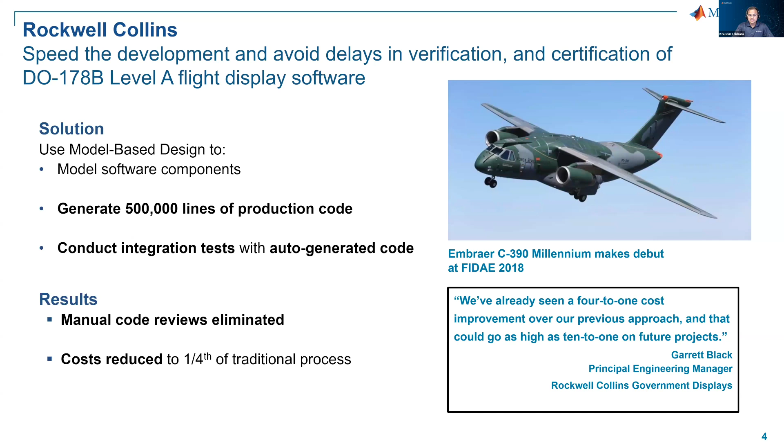So you would be curious, like, where is the industry using it? There are so many user stories out there where industries are using the model-based design approach, and they have developed the verification and certification of the DO-178B and DO-178C requirements, developed their flight controller software, developed their airworthiness certification software requirements. So we are going to talk about that. With this motivation, let's start our discussion with why we need the model-based design approach at the start.

So if we talk about how aerospace systems get built, we start with the concept of operations. We will be doing our research, and from research, we'll be coming up with the ideas that we should have X configuration, Y configuration, or a particular design. Once these configurations based on our engineering research are finalized, we go for the system requirements. These requirements may be either given by the competition organizers, or in the industry, by your customers, or they can be formulated based on your ideas for competing for your score.

So once your requirements are finalized, you move forward and develop your system architecture, and accordingly, you develop your component design, and you implement your component. It may include developing your software as well as hardware, and finally, you integrate all these software, hardware, and various components to make the subsystems, and from subsystems, you integrate the system.

Along with all of this subsystem and system integration, what major requirement comes is system test and verification, where finally you test how your system is performing, whether it meets your requirements or not, and if it meets the requirements, you're well and good to go for the launch, and then you go for your operation and maintenance.

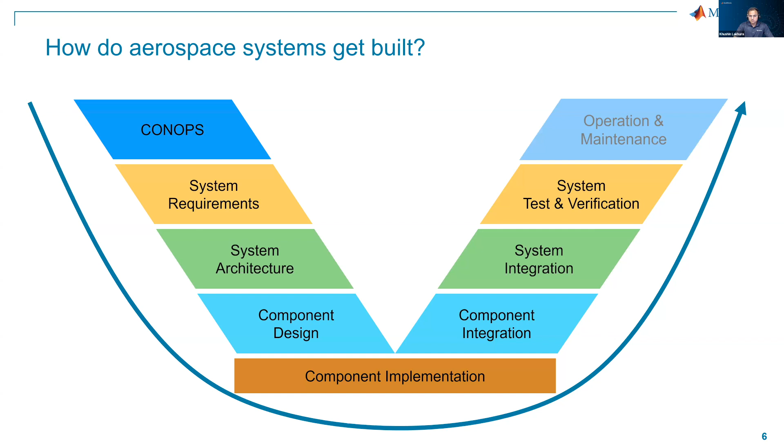So here for this discussion, we are not going to talk about ConOps and operation and maintenance, but we would be more talking about our design cycle starting from system requirements to system test and verification. So if we talk about the traditional design approach, it will have...

It includes continuously moving step by step, and it may have its own issues.

So if we talk about some of the issues, system requirements start with documents. Most of the time, system requirements are either in a Word document or ideas that have been captured into documents, which may be difficult to interpret. Also, if you want to see the impact of these requirements on your component design or on your code, it may not be quite an easy task.

Moving forward, once your requirements are there, you move for system architecture and go for component design. It includes developing your physical prototypes, which is actually expensive and prevents you from doing rapid iteration. And because you are developing the components separately, it does not give you an opportunity for system level testing until your complete system is ready.

If we talk about component implementation, which includes software development, you may be doing manual coding, which is not only time consuming, but as it is based on human skills, it may introduce defects and variance. And sometimes if other people are using it moving forward, it may be difficult to reuse as well.

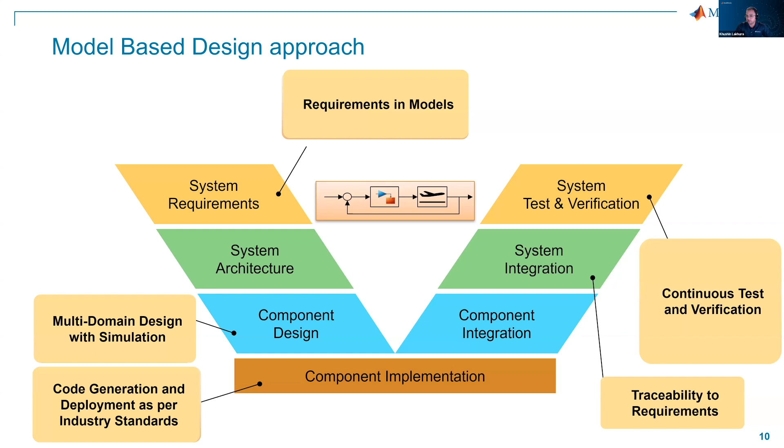So now the point is, what are the tools using which we can perform this model-based design? Can we do it using MATLAB and Simulink? MATLAB is a platform used by engineers and scientists across the world to perform numeric computation, data analytics and visualization, algorithm development, and a lot of things.

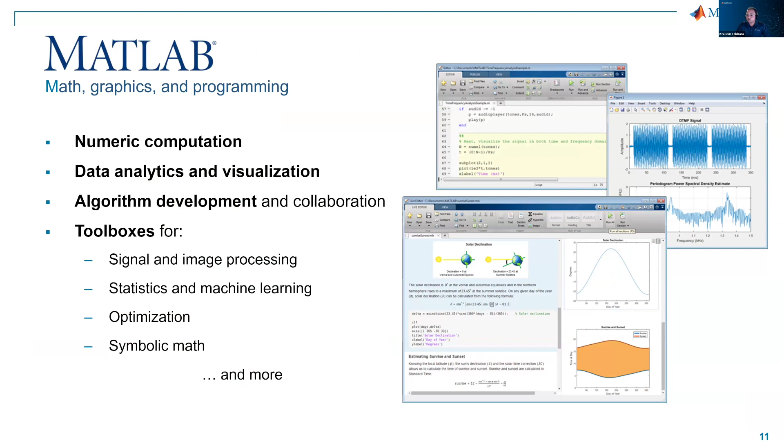MATLAB is used from the audio industry to the aerospace industry. It has its own programming environment, and it's also supported by multiple GUI apps. So it's not just a programming language, but it's more than that. It's a complete platform which helps you to do a lot of modeling and simulations.

Moving forward, we have Simulink. Simulink is actually the model-based design. It's a block diagram modeling approach. So here, instead of coding, you have blocks and signals which you connect, and you create the components, subcomponents, and then the subsystem and the complete system.

This layer by layer approach helps you to take care of your model-based design requirements with more than 100 toolboxes and block sets. Simulink supports a wide variety of industries.

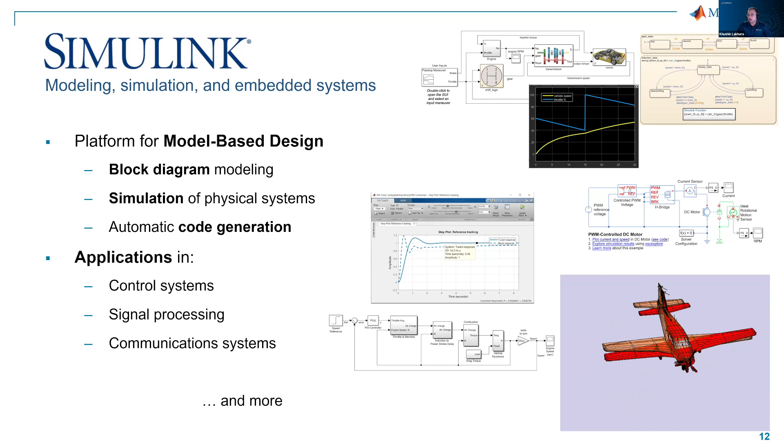So now you would be curious, like we talked about MATLAB and Simulink, we talked about the model-based design, but how is the industry using it? So Bell Helicopters developed their first civilian tilt rotor using MATLAB and Simulink, and they could reduce their development by 10 to 1.

That was a great achievement for the team. Project development time was reduced by 80%. They could find all the problems earlier and eliminate them faster, and they could meet all their certification requirements as well.

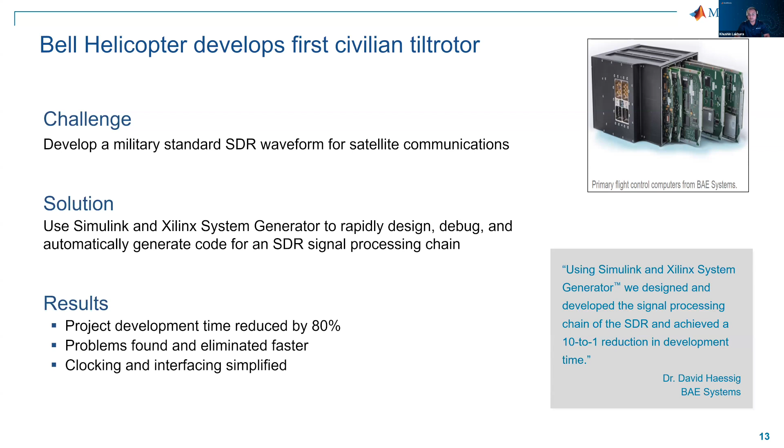Now, as we have motivated you enough about the model-based design, you would be curious about how model-based design is actually accelerating the workflow. What is there which is doing it? If we talk in detail, it has a verification and validation approach.

So how does it help us? Let's do a deep dive and understand how the verification and validation approach, which we would be calling V&V moving forward, how the V&V approach of MBD accelerates the workflow.

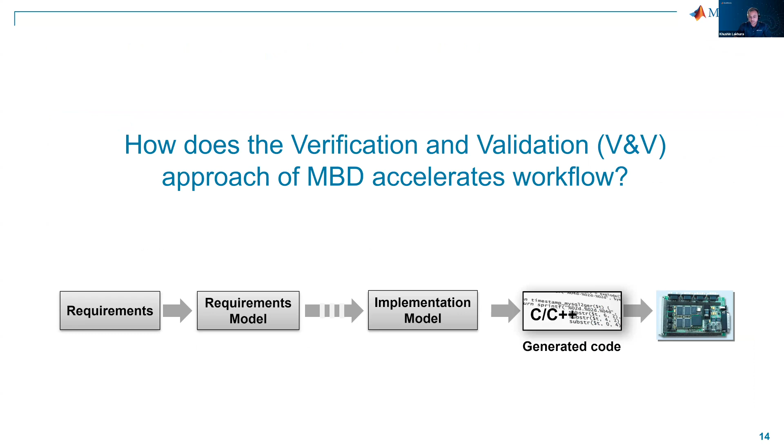So when we talk about model-based design, it's actually the amalgamation of two things: one is modeling, and second is automation. Modeling involves simulation and analysis. So you can develop your components, you can model all your physics using MATLAB, Simulink, and Stateflow.

You can do your simulations. Using the simulations, you can do a number of analyses and optimizations, and optimize your overall system performance.

Once your modeling is done and you are ready with your models, moving forward we had to integrate them with the hardware, and also make sure that whatever is working in the simulation goes well with the hardware. That's where the automation capabilities of the model-based design help you.

So you can do code generation instead of writing manual code. You can deploy your code on the hardware, and with software-in-the-loop simulation and hardware-in-the-loop simulation capabilities, you can actually do real-time simulation and testing, and find if there are any integration issues and fix them. Moving forward, it also helps you to model and code verifications, automating manual checks.

So you don't need to do all the checks one by one. You can develop your custom guidelines for the models, and accordingly, using Simulink Check, you can develop your check guidelines, which can be directly implemented on models.

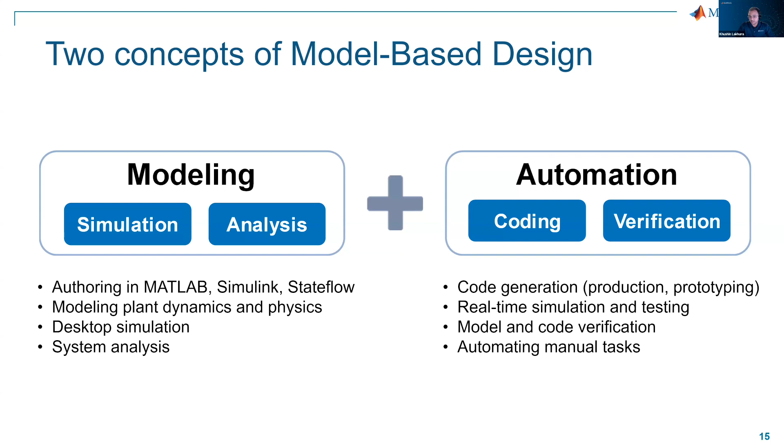So let's deep dive and understand how this analysis and everything comes up. If you look from the competition organizers or customers in the industry, they give us some requirements, and what they finally look for is they want to see the performance. So they link the requirements to the systems, which is connected to the components. So this is actually linking top-down and bottom-up workflows.

But as a system engineer, what we want is an abstract view which doesn't have all the details, but we can get an idea of how my system is working. So for that purpose, you can use the Requirements Toolbox for modeling your requirements.

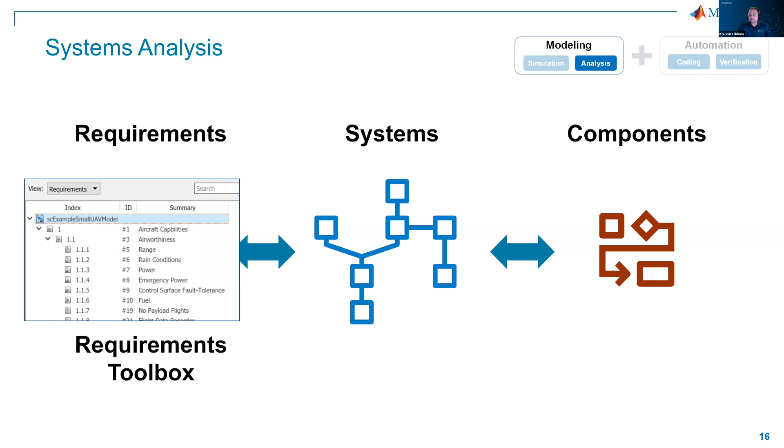Once your requirements are modeled, using System Composer, you can author a complete system architecture and link all of your requirements to your system. And finally, in Simulink, you can model your plant physics or plant dynamics and various subcomponents and generate a complete system-level design.

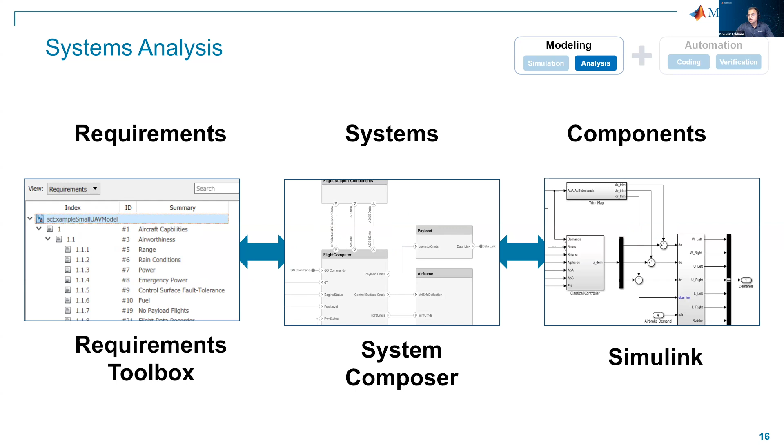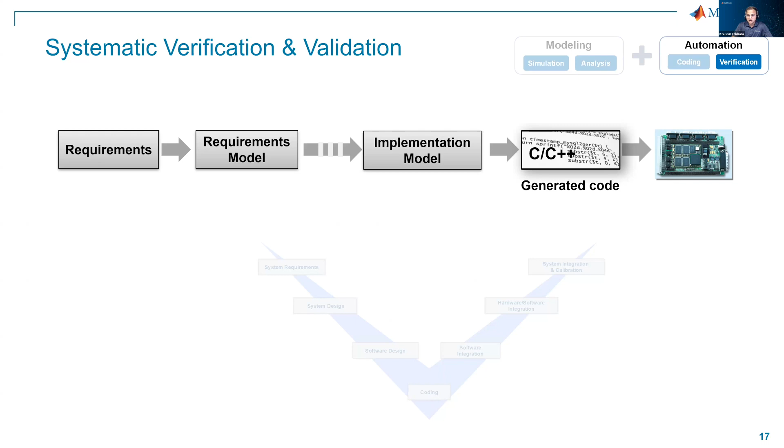Once your modeling is ready, the systematic verification and validations are to find defects sooner and shorten your launch time. This is the outline of the MathWorks model and verification approach, and our customers have reduced cost and project risk by early verification through authoring and managing requirements in Simulink, automating manual verification tasks, and all of these capabilities are part of a workflow which conforms to safety standards. When working with safety critical systems in aerospace, it becomes crucial that you embed safety requirements in your design from the start, instead of completing your design and only then going for certification.

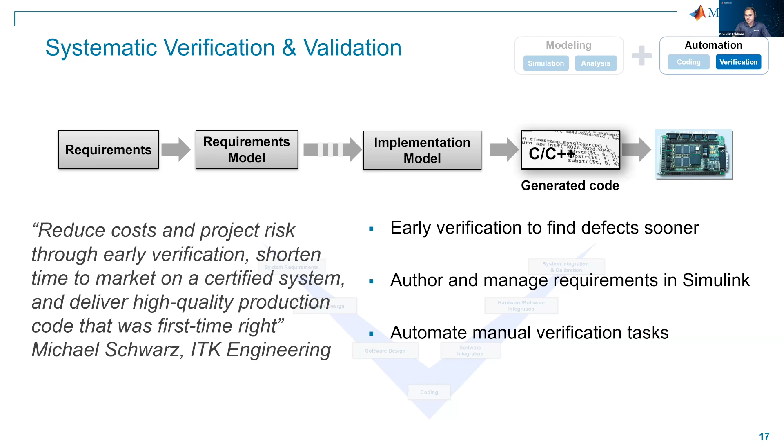Let's move forward and understand how each component of this high integrity verification flow works. Once your requirements are modeled, either from text or other requirement capturing tools, we create the requirements models from that. Once your requirements are formalized and finalized, we create the implementation model. This implementation model mostly covers your complete vehicle, your various subcomponents, your plant dynamics, and all the capabilities you want to capture in your system.

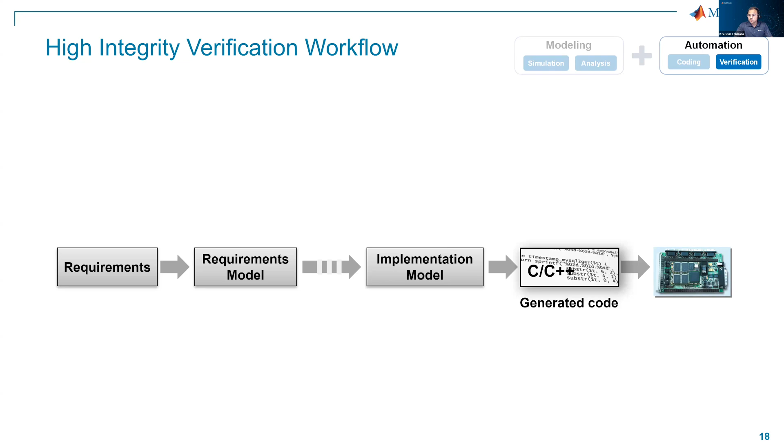You develop that, and once your implementation model is free of all errors, runs all the checks, and also complies with your industry standards, you move forward to generating the code. This code generation can go on the hardware, which can be finally integrated on the hardware. Throughout this design process, it gives an opportunity to identify and trace how the requirements we provided are impacting each part.

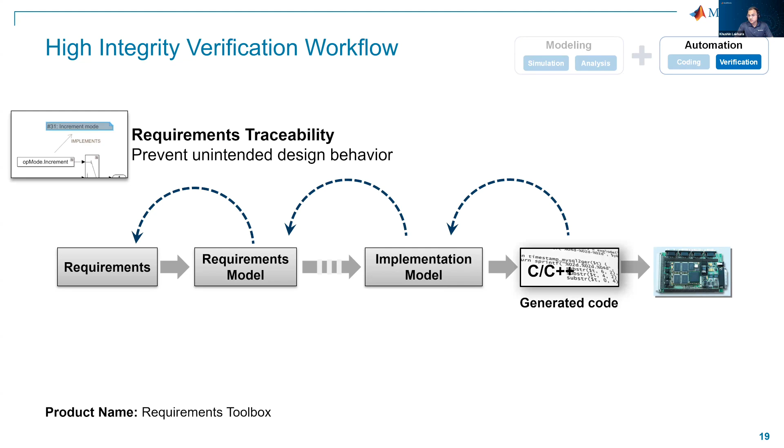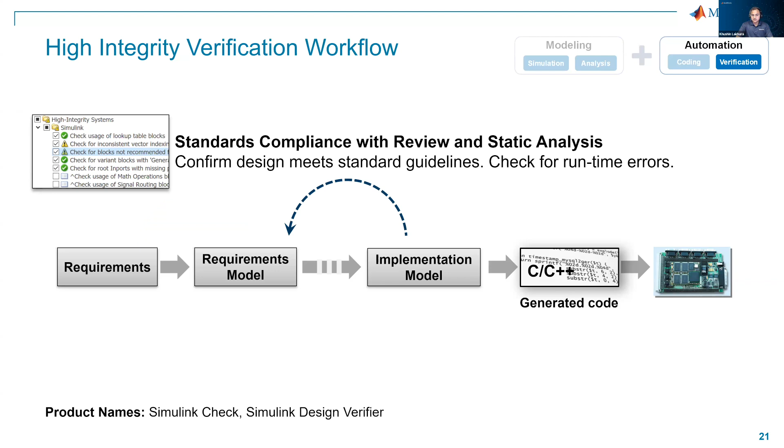So for all these purposes, Requirements Toolbox helps us formalize and validate requirements using requirements modeling. Your requirements conform to the requirement models, and your requirement models are connected to the implementation models. This requirements modeling ensures we are adhering to standard compliance reviews and static analysis. You can use Simulink Check and Simulink Design Verifier to make sure all these things are working, taking care of defining your custom checks or standard specific requirement checks. Once these requirements are done and you do formal verification that your implementation model and requirements model are robust and meeting all requirements, you can move forward and do your model in the loop testing.

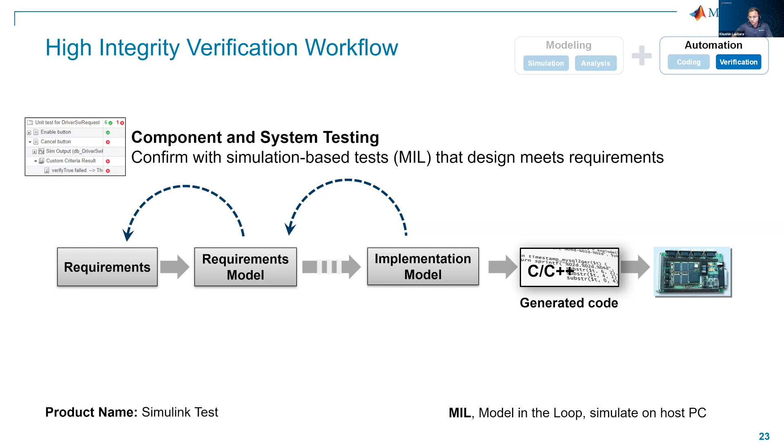Model in the loop testing mostly involves making sure my model meets all the checks and all the defined requirements. These may be design requirements, your industry standard requirements, or your company requirements. Once your model in the loop testing is done in simulation, we can move forward for software in the loop testing, processor in the loop testing, and hardware in the loop testing.

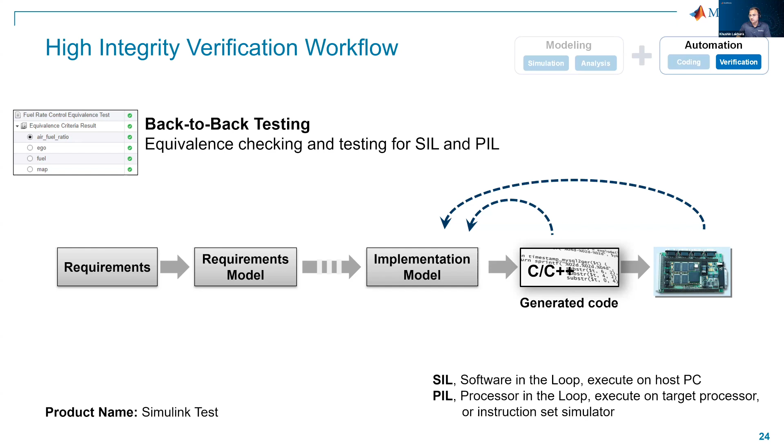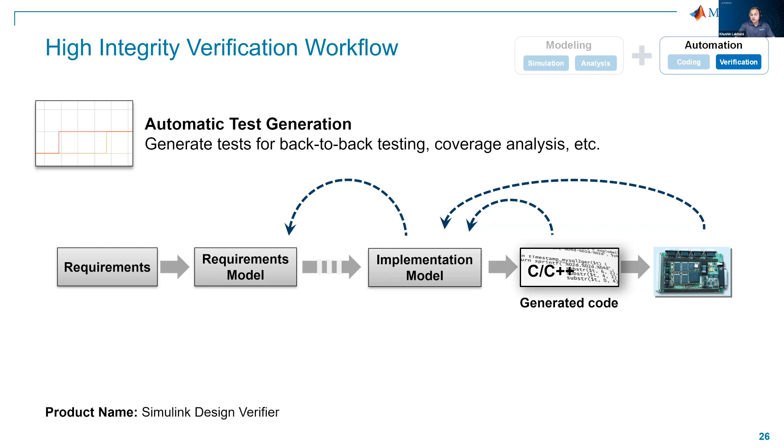This makes sure that whatever code we generated, whatever model we implemented, is also adhering to industry standards, and the generated code is also adhering to your industry standards. Once you perform that, you are ready to generate various tests and test your system performance against various checks. You can do that using Simulink Design Verifier and Polyspace Code Prover.

So that's all about Simulink, and that's all about how the V&V approach of model-based design helps you accelerate the workflow.

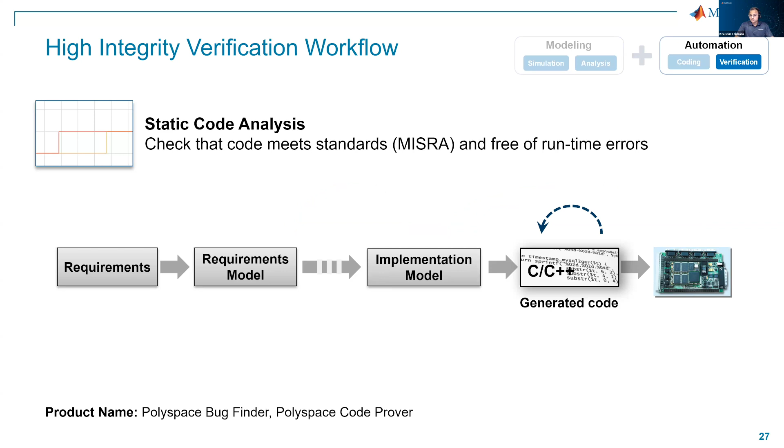This is another user story where Hella reduced their sensor development time by 60%. They modeled their requirements, validated and design verified months earlier than was previously possible with their process. They could also produce a prototype incorporating 80% of product functionality within months, which earlier took years.

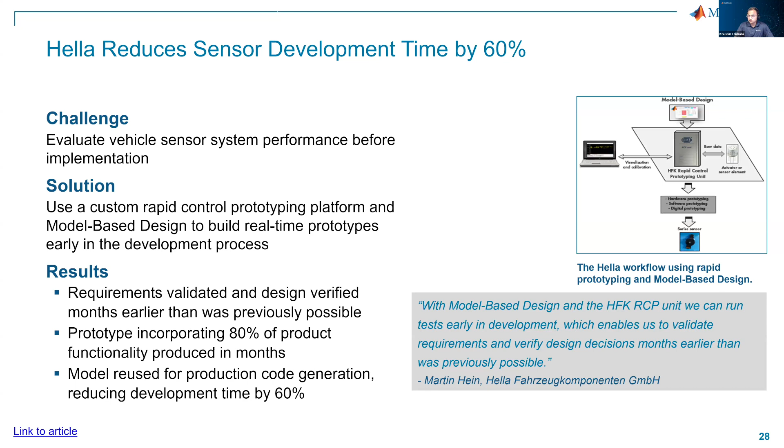With this motivation, I know you would be curious about which tools or capabilities of MATLAB and Simulink help you perform this model-based design. So now we would be going through each part of our model-based design approach, starting from the system requirements - how it helps you, and what tools you can use. Let's start our discussion with system requirements, where, as we discussed, traceability is something very important.

The reason traceability is important is that it ensures your application is complete, fully tested, and meets all the requirements. Also, if you are making any changes, you should be able to understand how a component level change can impact your requirements.

And if you are making any changes in the requirements, what components or subsystems it will impact. So you should be able to get the impact from both sides, from requirements to component and subsystem, and from components and subsystems back to requirements.

And obviously, most importantly, we have to adhere to the industry standards. So let's see how these requirements and issues can be mitigated using the requirements toolbox.

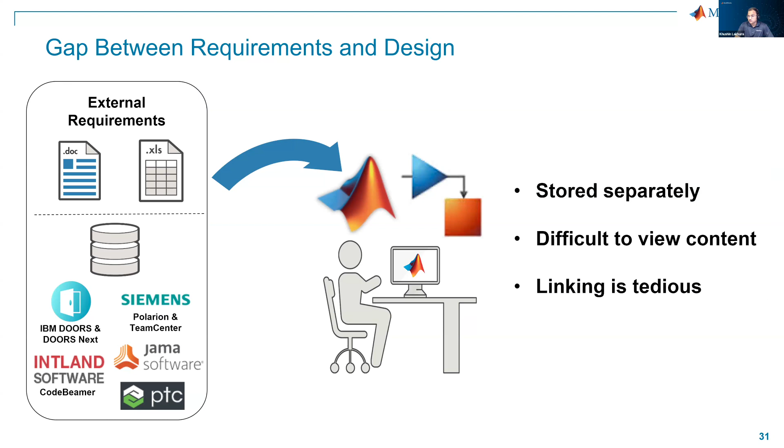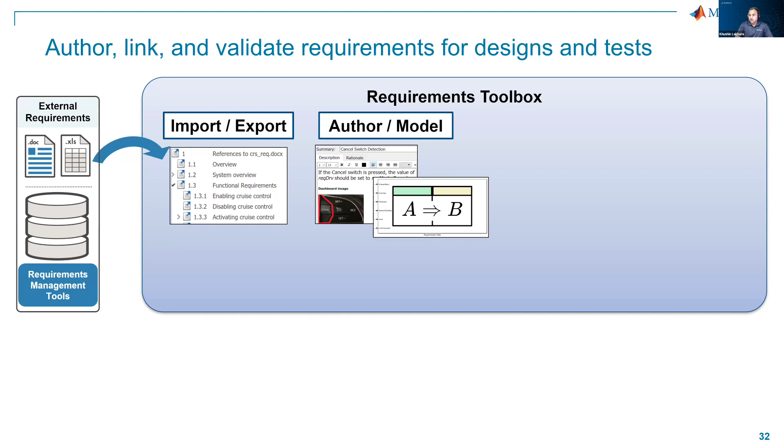The requirement toolbox helps you import all these external requirements into the model-based design approach of Simulink, and you can create your own requirement model. Moving forward, you can link this complete model with the various subcomponents that you are building using Simulink and MATLAB, and make sure all of your requirements are being met.

You can also link all these requirements to various tests and generated code. This gives you the capability to analyze how your requirements are implemented and verified throughout the system, whether there are any issues, or whether relieving the requirements can get you better results.

So all this analysis you can do. And finally, you can generate requirements reports for review and certification submission. Moving forward, there are a lot of capabilities that the requirements toolbox can do. We have a short video here which explains more about the requirements toolbox.

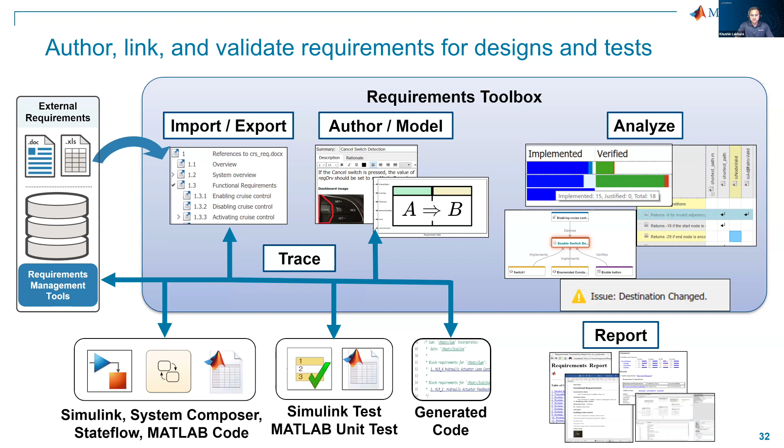Let's have a look. Requirements Toolbox lets you author, link, and validate requirements within MATLAB or Simulink.

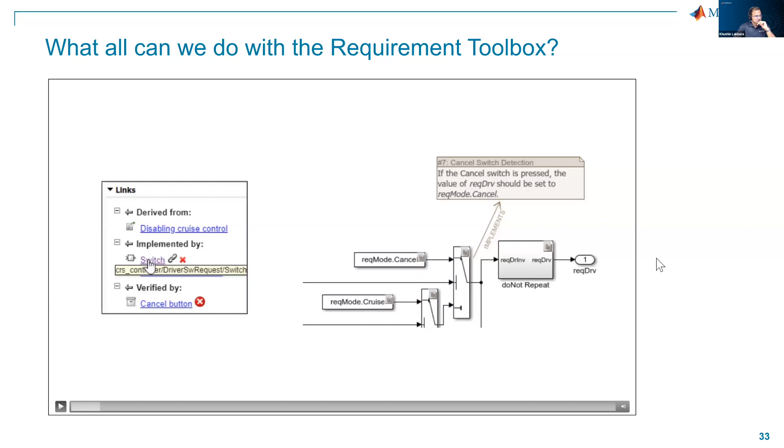Gwen, can you confirm if this video has audio? Yes, the audio is working. Okay, fine, thank you.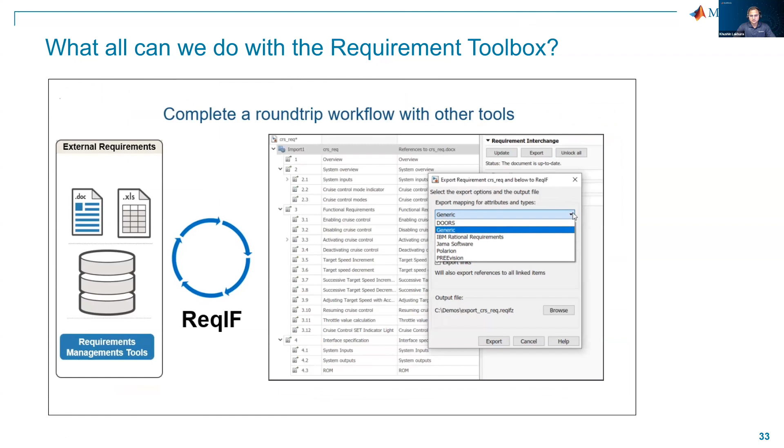Track their implementation and verification status, and quickly respond to requirements changes. Requirements from external sources can be imported and viewed within your development environment. You can exchange data with other tools using an industry standard interchange format.

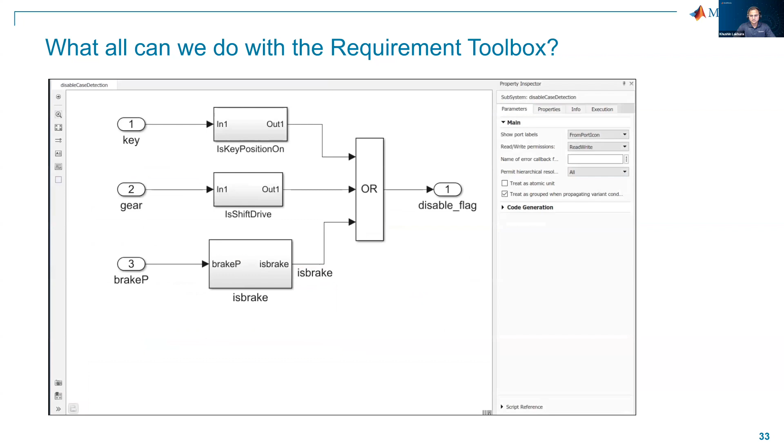You can formalize requirements with a requirements block and validate they are correct. You can manage requirements directly within Simulink, System Composer, and Stateflow. Traceability to designs can be quickly created through drag and drop.

Badges indicate where links exist in the model, and you can show requirements content directly in the diagram without modifying the model.

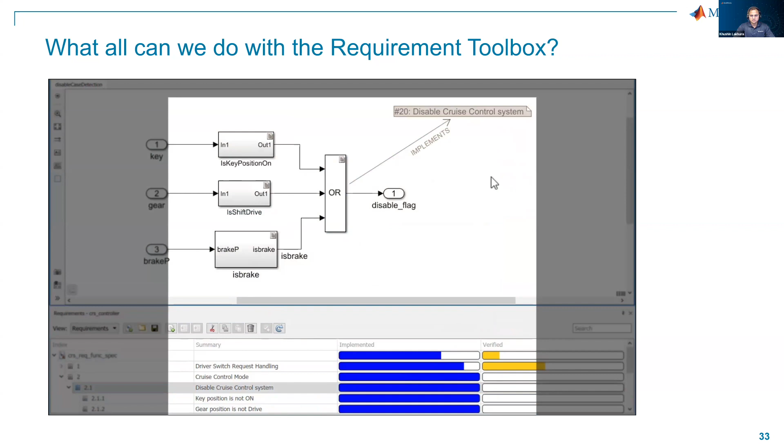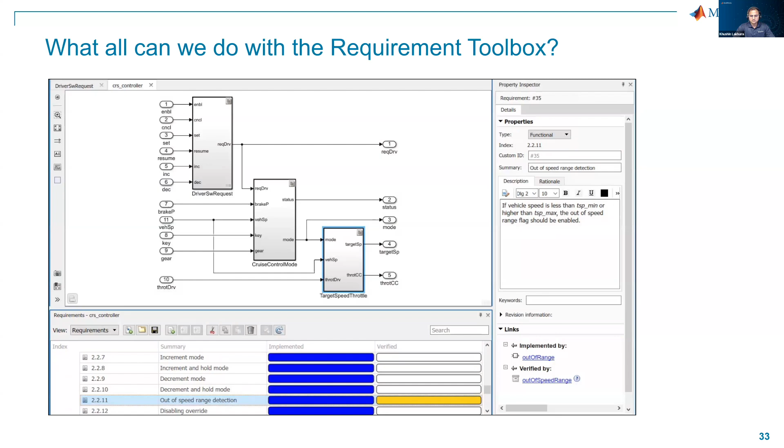Navigate directly to related design elements with traceability links. If you select a requirement, its related design elements are highlighted, and if you click a block, the linked requirements come into focus. You can also link requirements to test cases to track their verification status.

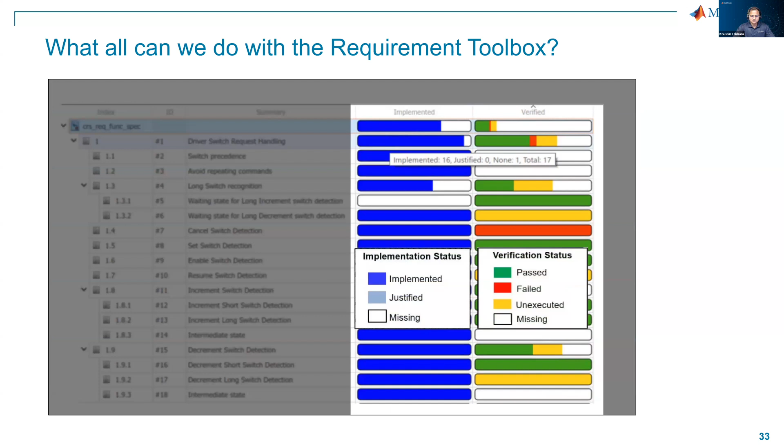The implementation and verification statuses show the completeness of designs and related tests. To review traceability between artifacts, use the traceability matrix. You can directly create links where there are gaps.

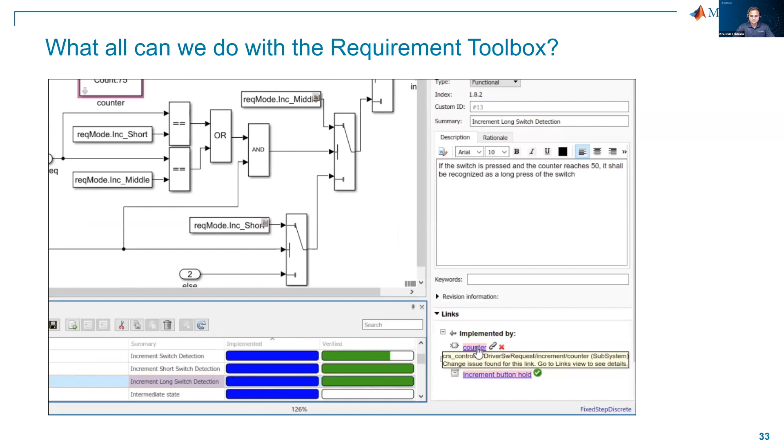When a linked requirement or test changes, you are notified so that you can determine the impact of the change. You can visualize upstream and downstream artifacts using the traceability diagram.

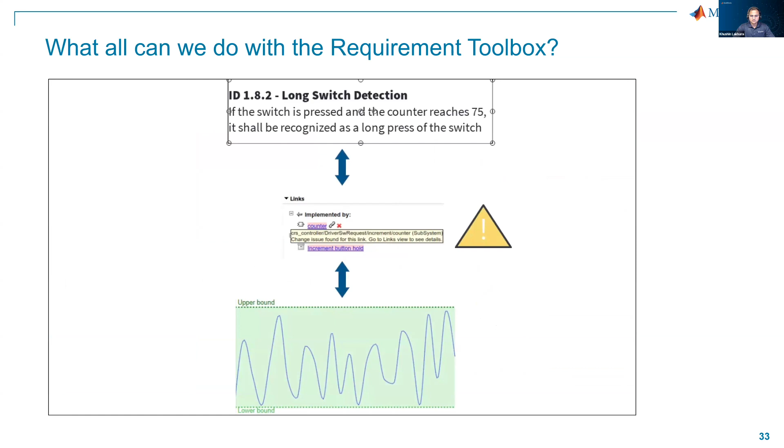Establishing full lifecycle traceability enables you to document that your requirements are being met, understand the impact of any changes, and create a digital thread between requirements, MATLAB code, designs, generated code, and test cases.

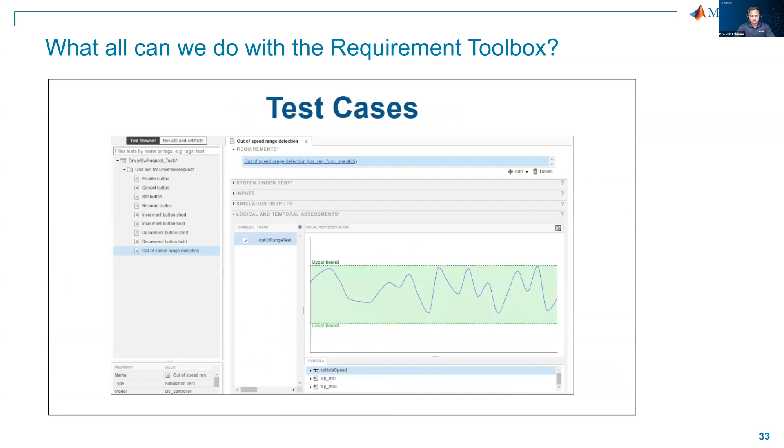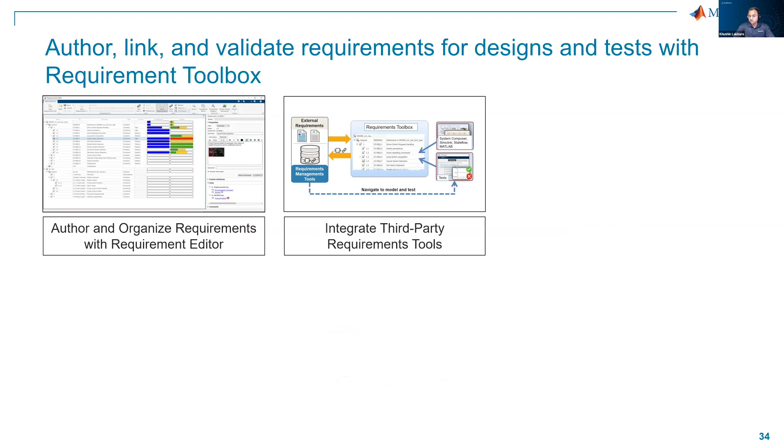So, to summarize all the capabilities of the requirements toolbox: you can author and organize requirements with the requirement editors. You can integrate third-party requirement tools, either IBM tools, or your Word file or Excel file, where all of your requirements are mentioned.

Moving forward, throughout your design process, you work with requirements and design together. So you always know how your components and subsystems or system need to function, or if there is any special impact coming on the component level because of a particular requirement.

It also gives you the opportunity to continuously analyze your requirements coverage: which requirements you've met, which requirements are verified, or which requirements still have issues. Depending on that, you can also add comments and justifications for them.

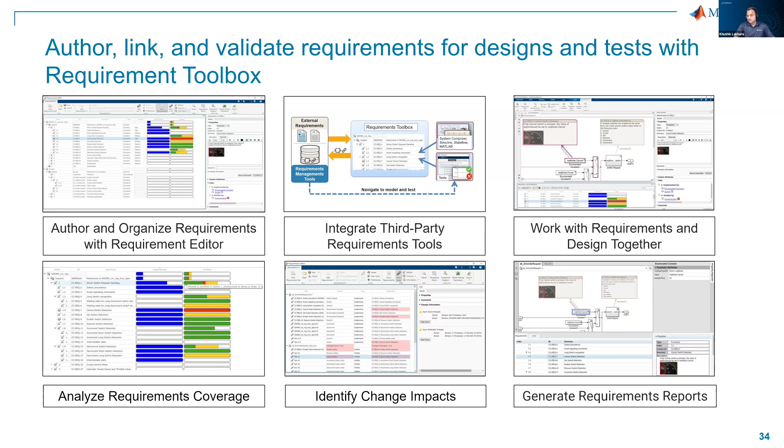It gives you the benefit of identifying the change impact, so you are not worried about what is making what change, either how the requirements impact the subcomponents, or how the component design is affected by requirements. And finally, it gives you various reports that you can generate, which you can use for review and your submissions.

Moving forward to system architecture, once your requirements are finalized, we need to develop the system architecture. At this level, you may not be developing complete design models or subcomponents yet, but you know what each system or subsystem should be able to do. Connecting these requirements to the subsystems gives you, at a very high level, an idea of what your subsystem or component level requirements should be, and what you need to take care of for integration.

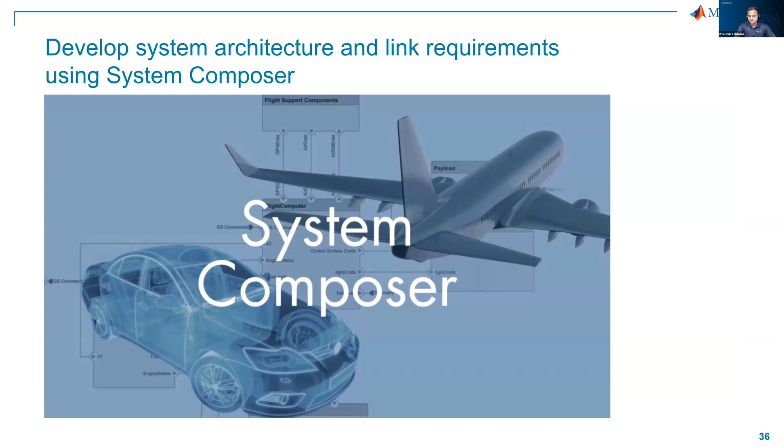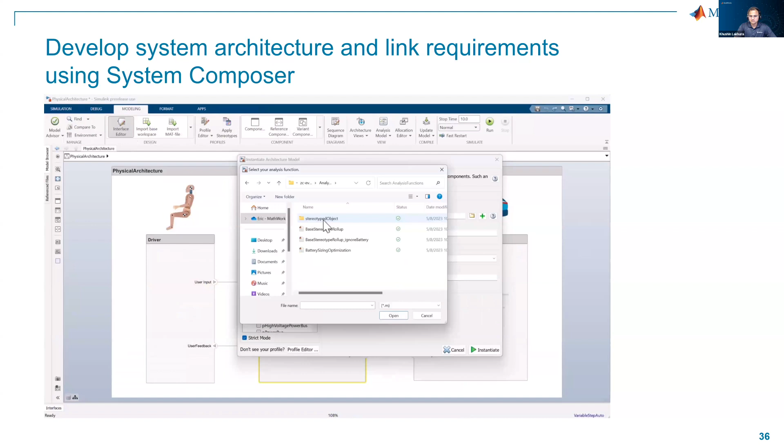Let's see this with a short video on System Composer, which helps us develop the system architecture and link requirements. System Composer is a model-based systems engineering tool for system and software architecture design, allowing you to decompose complex systems or a system of systems into smaller, more manageable pieces. This easy-to-use tool bridges the gap between high-level requirements and low-level algorithm and simulation workflows, allowing for scalable specification and analysis of system and software architectures.

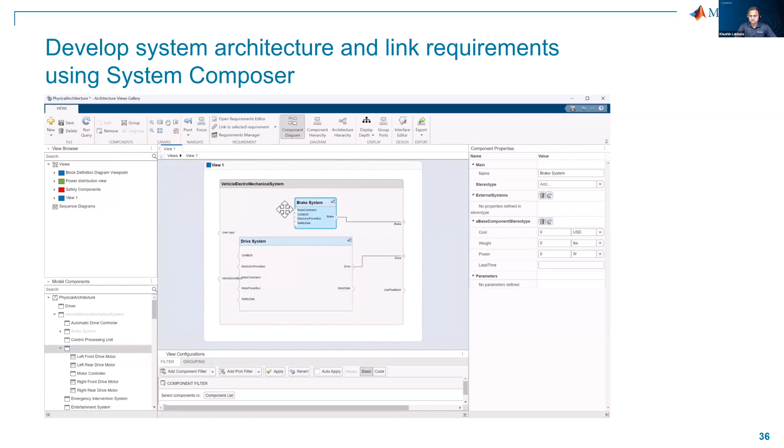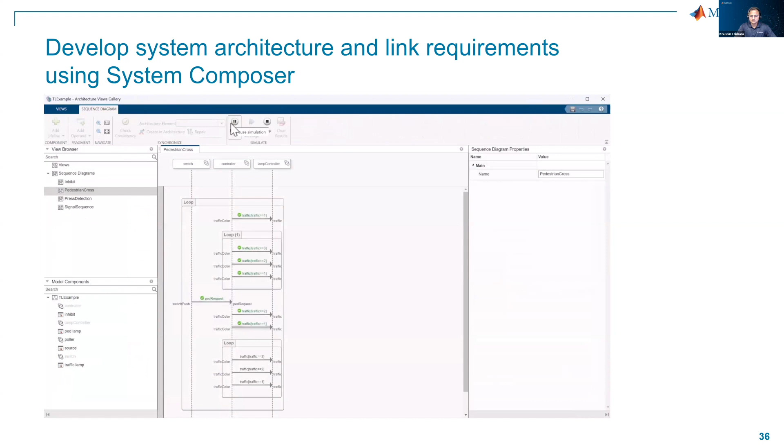The tool lets you author and edit architectures, link requirements to architecture and test cases, and define custom properties of architectural elements. With System Composer, you can generate new views of the model to gain insights into functional flows, component dependencies, and more, and you can also edit those views directly. You can define software architectures from built-in templates that are generic or specific, like AUTOSAR Classic and Adaptive. You can even model the behavior using various formalisms, such as block diagrams, state charts, and sequence diagrams.

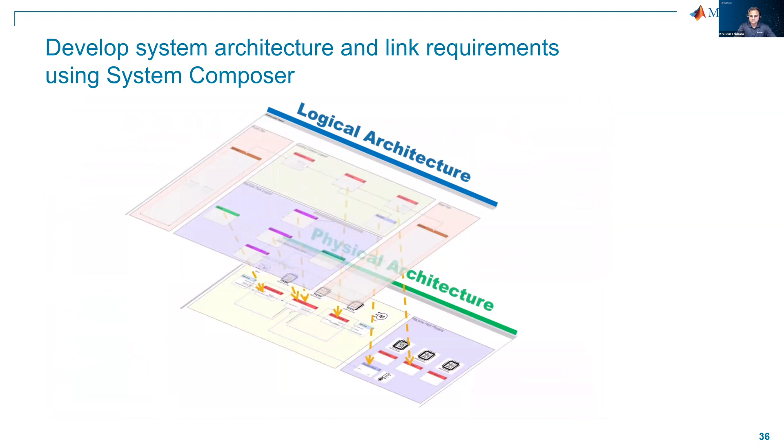Another feature of System Composer is the ability to allocate or establish relationships between elements of different architecture models, which may represent different abstractions of a system, such as functional decomposition and logical or physical architectures. And of course, you can seamlessly integrate with Simulink, FMUs, legacy code, and more, for traceability and continuity from MBSE concept through model-based design and verification.

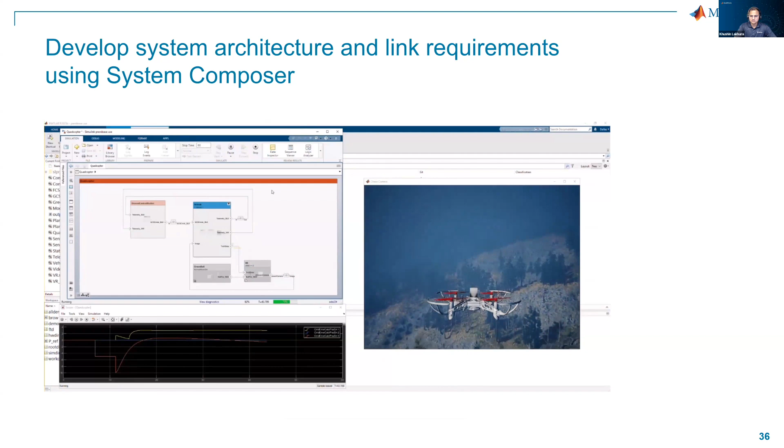So to summarize the video, System Composer gives you the capabilities to author your architecture and associate various architecture models to your requirements, adding custom properties to them, and doing architecture allocation to various requirements. You can also do behavior modeling, and finally, you can implement all these requirements with the component and system level model-based design.

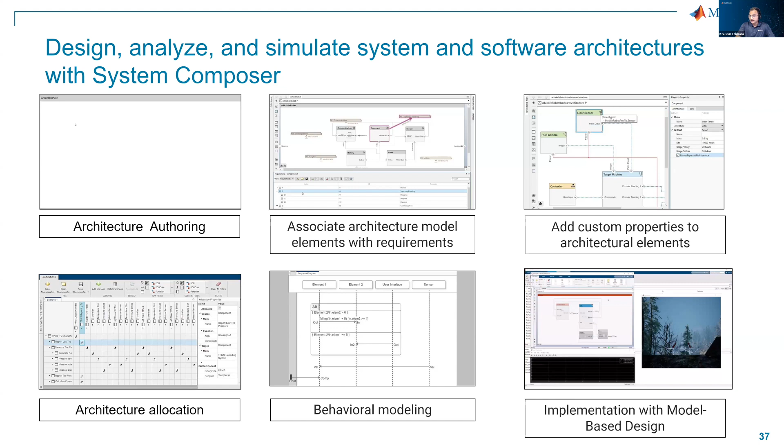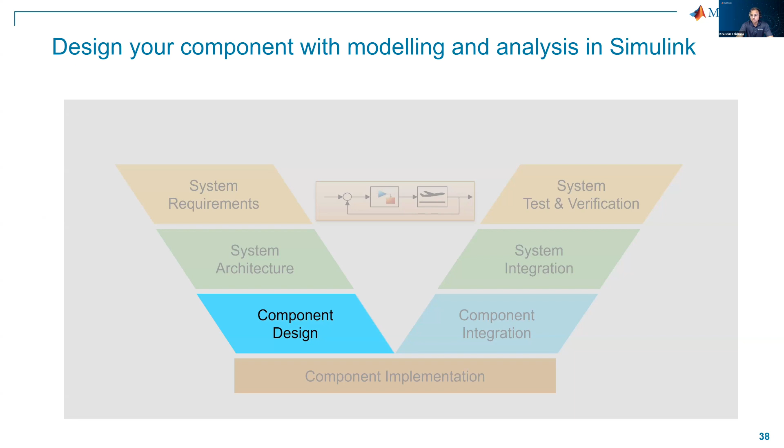So once your system architecture is ready, we move forward to component design. The component design may include various systems and subsystems—it may be your propulsion devices, your flight controller software, flight controller hardware, or the autonomous algorithm you are going to develop. There are multiple tools that help you do all of these, and for moving from system to components, we have specific libraries.

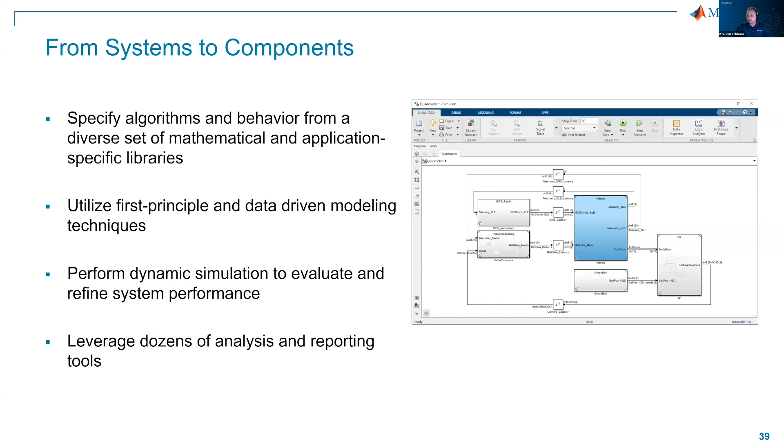These libraries help you utilize first principles and perform data-driven modeling in Simulink. You can perform dynamic simulations to evaluate and refine your system performance, and all of these come with a lot of available blocks specific to each library. So we are going to talk about such specific libraries, what we call block sets and toolboxes in Simulink.

With the Aerospace Blockset, you can model your vehicle components and bring in environment models to represent gravity and various environmental parameters such as density, temperature, pressure, and airspeed. Moving forward, at the system level, you can perform aircraft controls and stability analysis, which helps you develop your flight control system. You can perform complete mission simulations and flight visualizations to assess the dynamic performance of your flight vehicle.

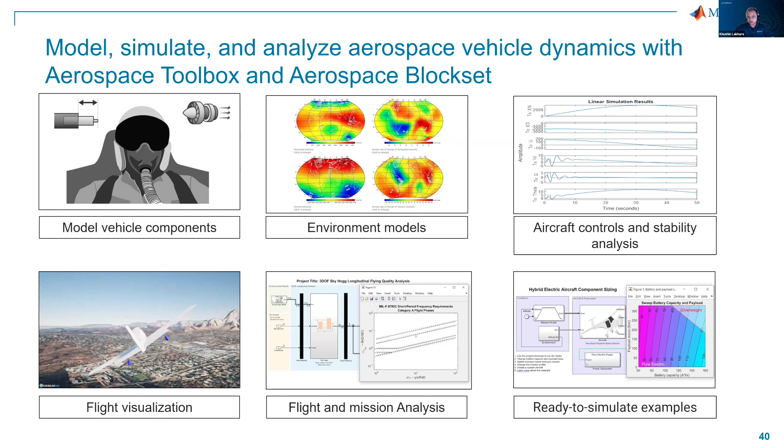You can also analyze your complete flight and mission—depending on your mission simulation, you can perform various flight and mission analyses. For all these purposes, we have many ready-to-simulate examples based on electric aircraft and jet aircraft. These ready-to-simulate examples give you a direct opportunity to bring in various subsystems, customize your data, and model your flight vehicles overall.

If you are going to work around the computer vision system using the Computer Vision Toolbox, you can automate image and video ground truth labeling. You can develop various deep learning and machine learning models and implement them with the Computer Vision Toolbox. There are opportunities for camera calibration so that you make sure that your camera hardware and the software views are aligning. You can also use the LiDAR and 3D point cloud processing and multi-object tracking capabilities as well.

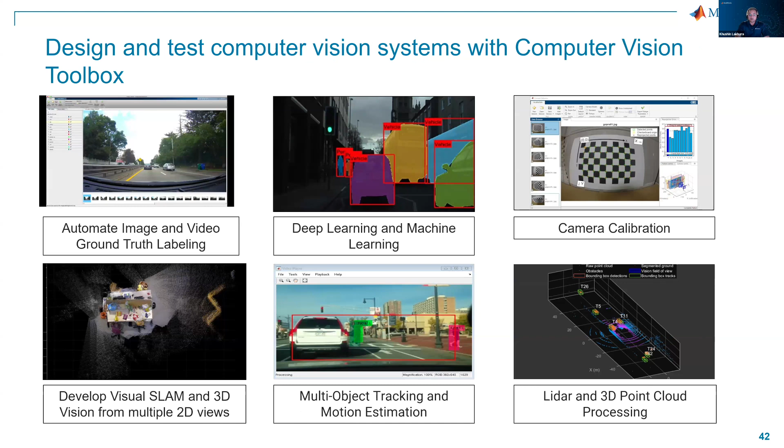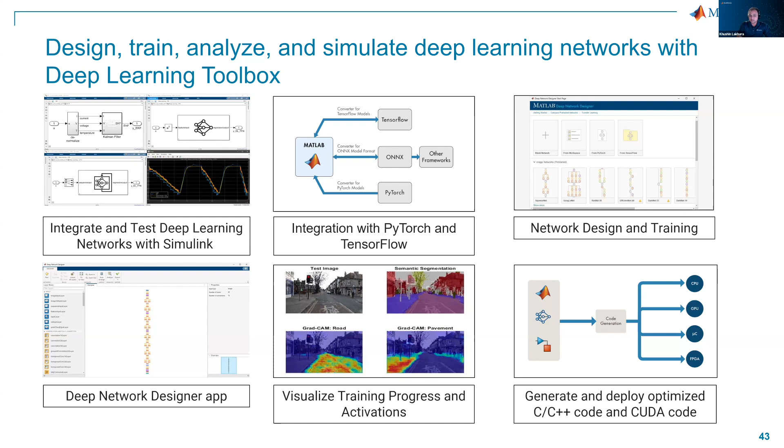And at last, you can generate and deploy optimized C or C++ and CUDA code for your hardware. So you don't need to worry about how the algorithm is designed or how your deep learning models are designed. You can take care of designing the models, and then finally, you can generate the code for them.

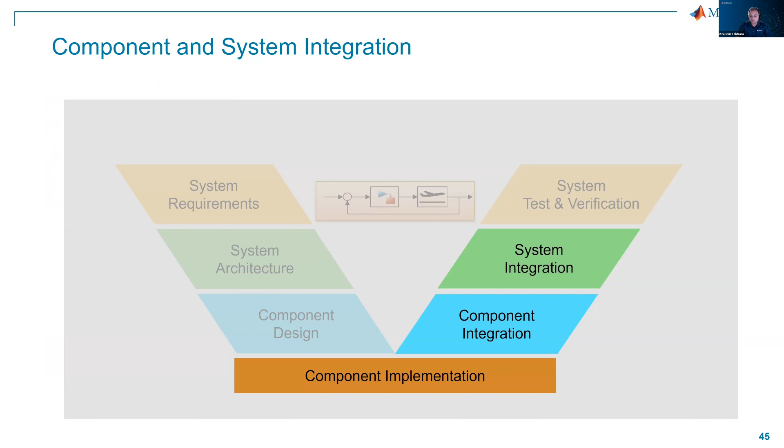Right. And once you are done with the component design, the next phase comes for the component implementation, integration, and system integration. So this phase mostly involves developing your code and deploying it on hardware. So with MATLAB and Simulink, we do have capabilities where you can deploy to the target with zero coding errors, and this support is available for various FPGA hardware, NVIDIA GPUs, and other CPU hardware as well.

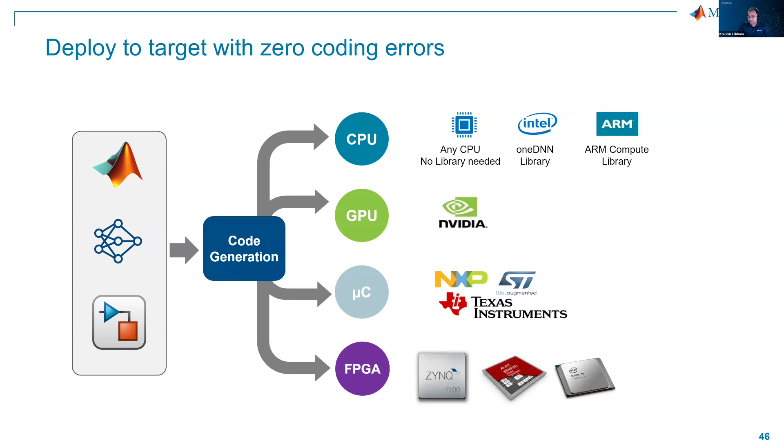So the opportunity for this is that it develops all the optimized code, and there are optimization libraries available. So for example, if you're working on Intel CPUs or ARM Cortex CPUs, or NVIDIA GPUs, you may be interested to run the optimization library based code specifically for these hardware. You can do this along with the modeling, and if required, you can generate library-free source code, which actually increases the overall system performance of your code.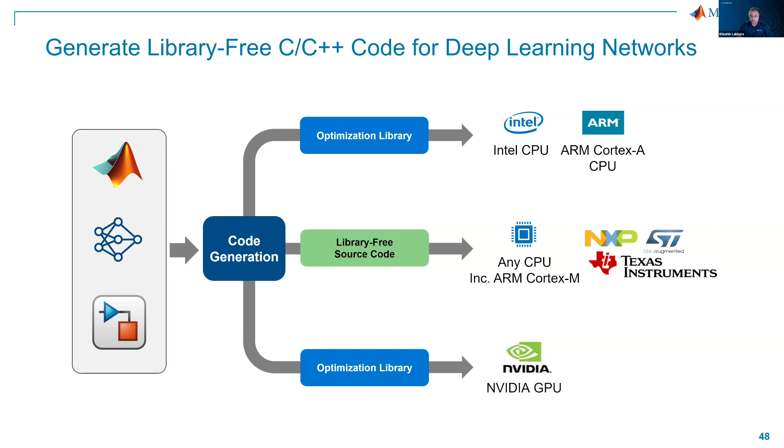So we do have a simple demo on how you can develop the code from a Simulink model. So using the Simulink Coder, you can develop the code for your complete system. So here we see that we are going to develop code for a jet engine blade model that is developed, and you select some of the modes and optimization parameters that you want to go for, and with a click of buttons you can develop this code.

The good thing is when you are developing this code, you can make sure that it's based on industry standards, and also this complete C++ code is generated along with the report. So through the report, you can analyze how your code is going to perform. Once your code is developed, you go for deployment either for the SIL simulations or for the HIL simulation.

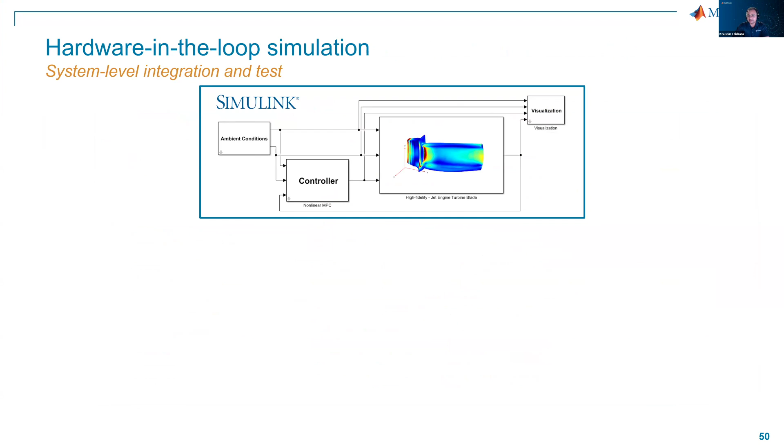So let's understand with a small architecture how it can go completely for a hardware-in-the-loop simulation system. So consider this simple Simulink model where we have the high fidelity jet engine turbine blade data which has been modeled, and we are trying to develop a controller for nonlinear MPC. So here we need to generate the code for testing this. We need to generate the code for flight controller algorithms separately, and we need to test it against hardware.

So what you can do is this controller code can go in your target platform, which can continuously work with your real-time computers such as Speedgoat, and on these real-time devices, you can generate the code for your plant model, and you can test your hardware-in-the-loop simulation capabilities. Yeah.

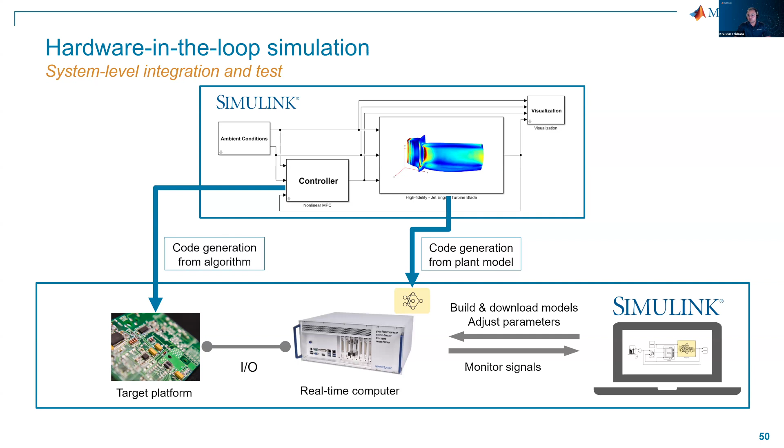And finally, we move to system test and verification, which is one of the final stages of our design cycle. Along with these design cycles, with the model-based design approach, we are analyzing our architecture development from the start, and we are making sure that we are meeting all the requirements and standards with the dynamic simulation and analysis tools. All the formal verification capabilities are performed, and you can also reuse the test cases.

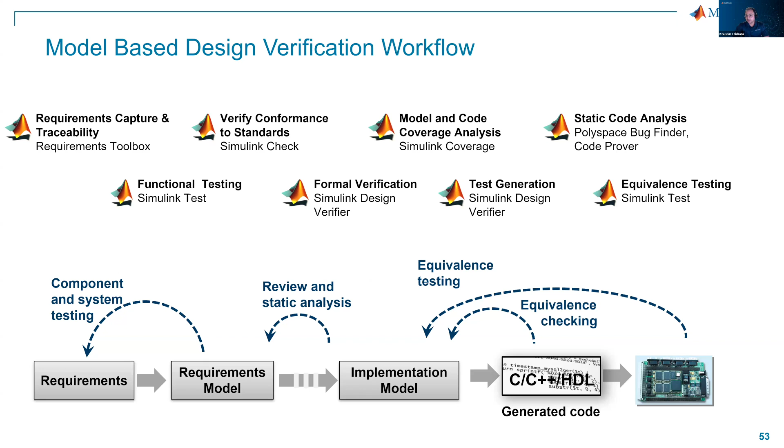So there are multiple tools available which help you do this, including Requirements Toolbox, Simulink Design Verifier, Simulink Test, Polyspace Bug Finder, Polyspace Code Prover. So all these are part of the model-based design approach with Simulink.

And there is one more user story where Alenia Aermacchi develops autopilot software for DO-178B certification, and they did it completely with the Simulink model-based design approach, and they could cut down the overall project period by a long time and also save a lot on their resources.

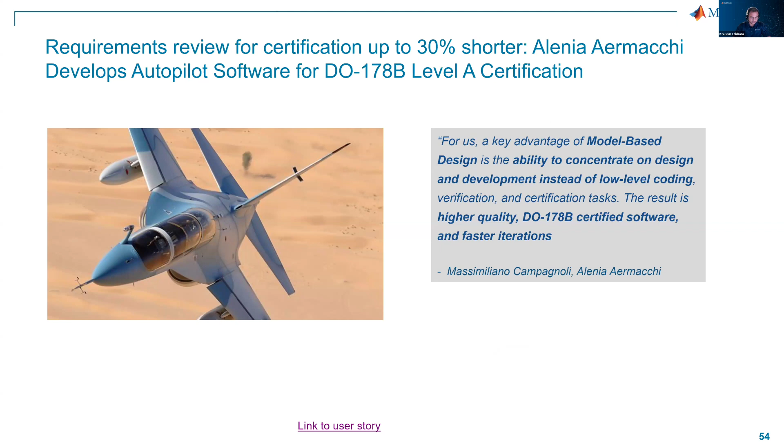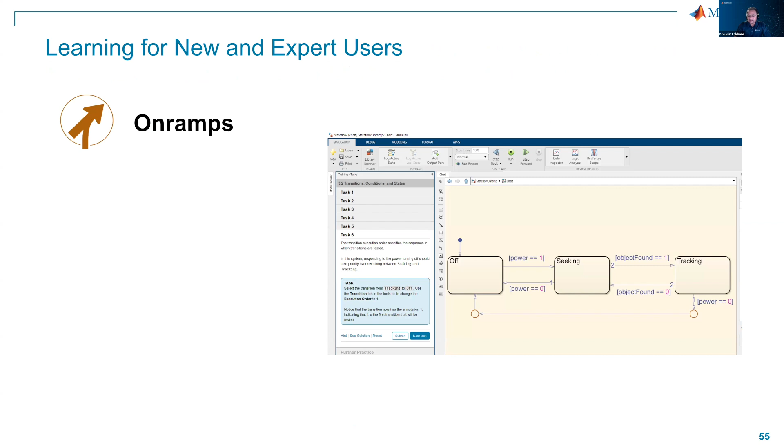So you may be new to all these tools we discussed during the webinar and want to learn more. For that purpose, we have a lot of on-ramps available, where you can start your journey learning about MATLAB and Simulink, System Composer, Requirements Toolbox, and there are a lot of videos available at mathworks.com, along with detailed documentation on how to use each toolbox and what its capabilities are, along with a number of examples. So you can use all these resources to start your journey with the model-based design approach.